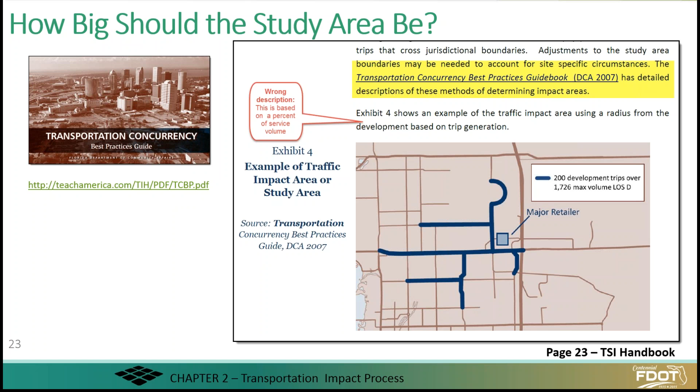Well, first, this picture came from the Transportation Concurrency Best Practices Guide. This document was done by the Center for Urban Transportation Research for the agency then called Florida Department of Community Affairs. This agency is now the Community Development section of the Department of Economic Opportunity. This guidebook is now out of print, but if you want access to this document, you can go to this page and download it.

For those of you that were not in attendance last month, simply put, concurrency is the practice of establishing a certain level of service and trying to make sure our facilities are operating at an acceptable level of service. So when a development comes in and has an impact on that transportation system, due to mitigation, we need to improve the impact and bring the operation back to the acceptable level of service. So that's what concurrency means.

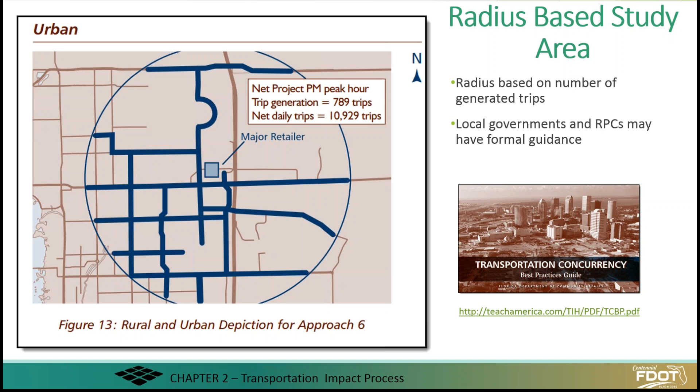So in order to understand the more difficult concept of a percentage of the maximum service volume, we need to understand a little bit of information about maximum service volumes as described in the Florida Level of Service Handbook and tables.

Let's say, for instance, that a certain community has adopted a level of service standard of D for its roadways. And let's say that the community has determined that any new development that adds 5% or more above that acceptable level of service is an impact and should be studied. So let's look at this example.

This is Deerwood Avenue. It's a 4-lane divided arterial, in an urbanized area, class 2. We are looking at it at peak hour, just to see how many vehicles this roadway or this development produces at peak hour. And as I said, let's say this local government has accepted level of service D for its roadways.

So we'll look at level of service D, and the maximum service volume for level of service D is 1,630. Before I go any further, let me show you where we got that 1,630 from.

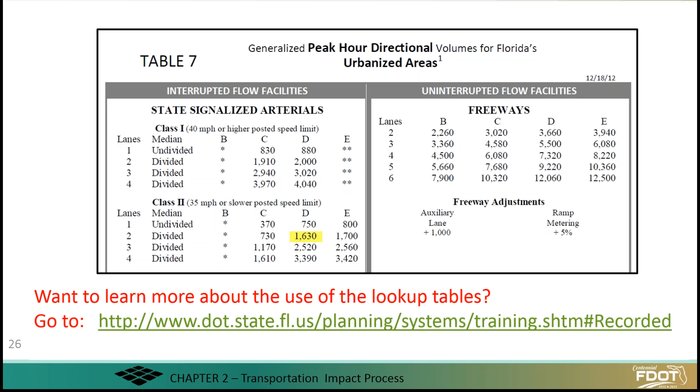Now let's go and do the calculation based on this service volume table. So we said the acceptable level of service, or the standard, is 1,630. This development produces 300 peak hour directional trips. So what do we do to see the impact? We divide 300 by 1,630, and that equals 18%. So this development has 18% more than the requirement.

Remember, we said 5% or more is an impact. So this is very significant — this is way over 5%. So again, mitigation takes place, depending on how big the impact is. We need to bring the transportation system back to a safe and efficient facility.

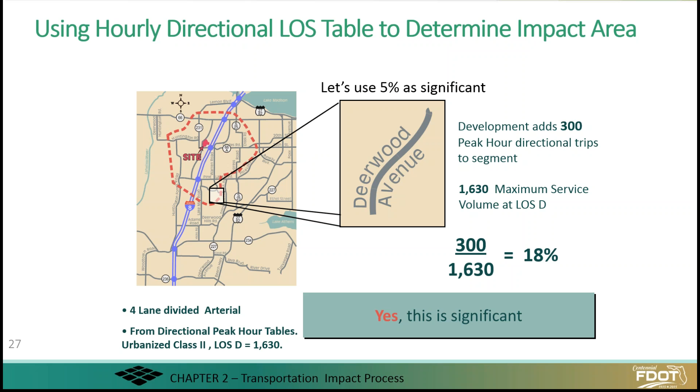At this point we've got large scale, small scale. I'd like to know what kind of impact studies are you involved in? You have a choice here.

As I suspected, this is a group of Renaissance people here. So I am going to close the poll and show it to you. You can see here that most of you do a range of developments, both large and small. Some of you do small developments, maybe in access management, driveway permitting, or small site plan review. I appreciate you answering that.

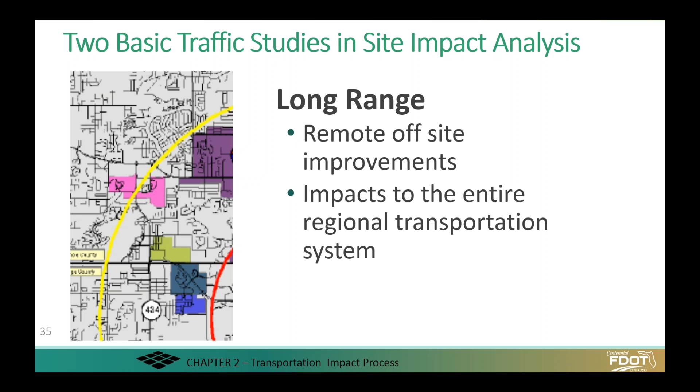So the long range kind of studies do take a look at remote offsite improvements. As you'll see in this next slide, this is a spreadsheet that used a version of our generalized service volume tables, or lookup tables, to look at what either existing or future projected levels of service are going to be.

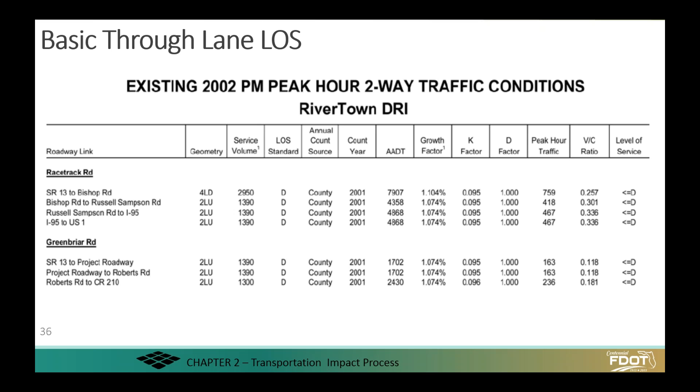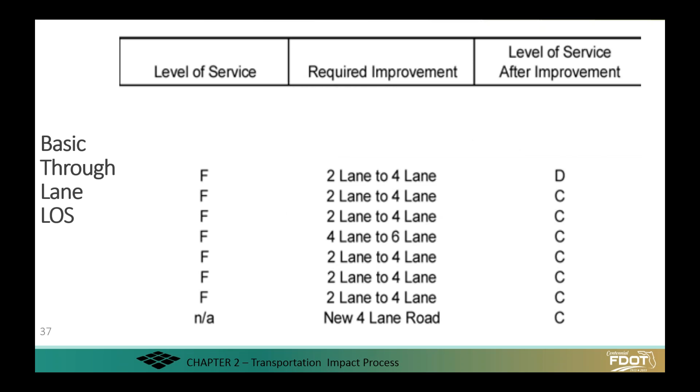Now, the short range improvements that we showed you a small portion of - this is a screenshot from a study of that proposed Walmart in Dade County. The study was done as part of a driveway access permit. In this example, Walmart is going to be built in one phase and have an immediate impact on the surrounding system. The things looked at are not necessarily widening of numerous roads in the region. Usually the study concentrates on driveways and signals surrounding and very close to the proposed development.

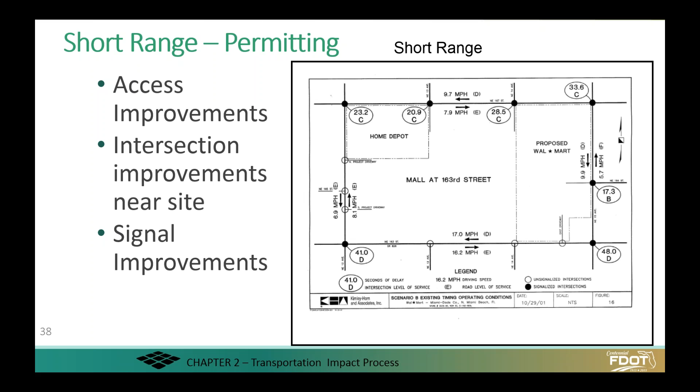As we expand this portion of the study, you can see the projected volumes, average speeds, and level of service at each of the intersections. This is because the most important features of traffic for this kind of study, found in access permitting here at DOT, are different than the kind you will find in the initial analysis of a development of regional impact or a big change to comprehensive plans.

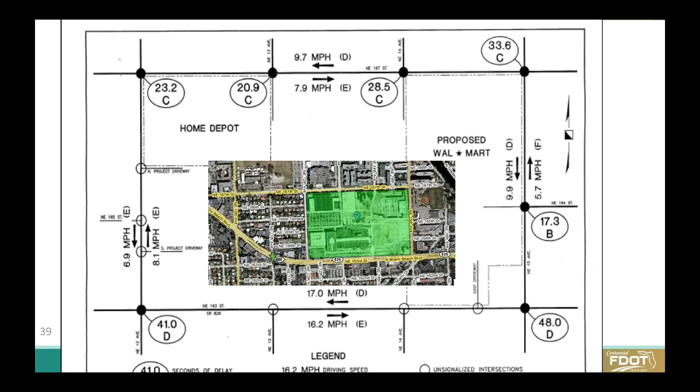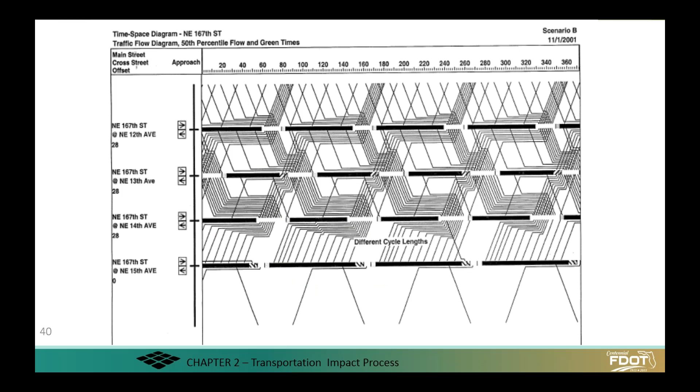This is a portion of the traffic signal progression analysis that was done for that Walmart. And this is the outcome and output of a queuing analysis that was done as part of that study of the Walmart.

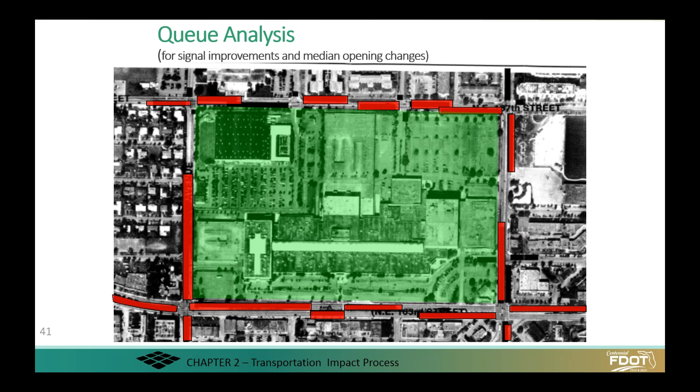So what I want to do is let you know that there are links in this presentation that you will be able to use as we send them to you, and there are links within the Site Impact Handbook also. While I'm at it, when you have your Impact Handbook open, if you go to the last pages of it, you will see that we have replicated every link used in the handbook chapter by chapter as one of the appendices, and that can lead to some pretty interesting surfing. So when you get a copy of the PDF of this presentation, you will have the ability to have all the links, even if something was done after the production of the Impact Handbook.

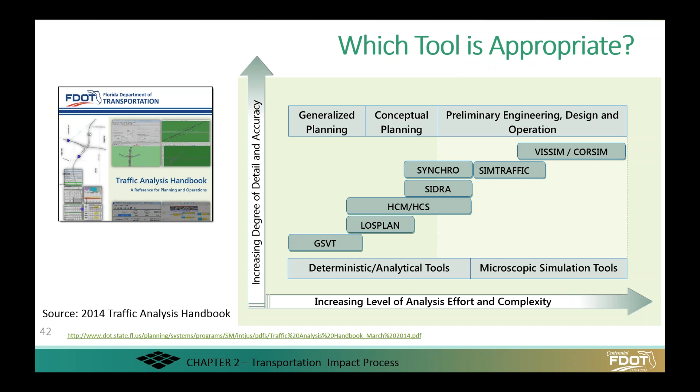highway capacity-based planning model that's used for arterials and freeways, and also for some rural roads also. As you go further up here into the Highway Capacity Manual, the Highway Capacity Software, Sidra, Synchro, SimTraffic, VISSIM, and CORSIM, what you're looking at are micro simulation models that have a lot of application, especially very close to a site, also for weaving analysis at interchanges when you need to know a more precise level.

So within the traffic analysis handbook, there is a much more detailed discussion of what are the recommended software and tools for the different kinds of studies. Again, you will find, and we will send you a link to the traffic analysis handbook. I'm giving you a chance to just quickly look at some of the kinds of studies and the recommended tools.

Okay, got another question I'd like to ask you, and that is, what transportation tools do you use or have you used in your job?

Yeah, it's coming out again as you guys are definitely the Renaissance people here. I'm going to close the poll in a few moments, give you a chance.

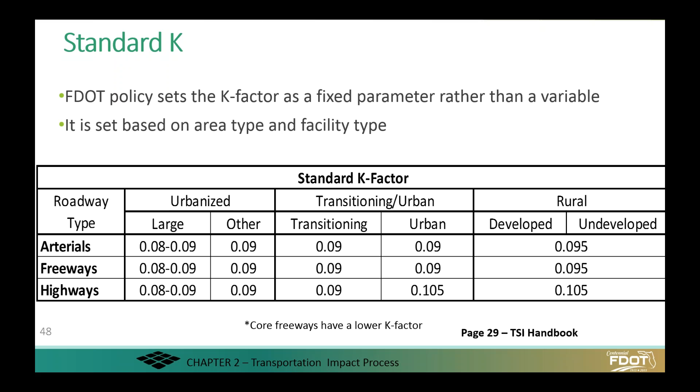I know this isn't the time for it, but I see questions coming in pretty solidly here. One of the questions is whether FDOT has a policy preference on what tools to use—for instance, should they use HCS, Synchro, or other tools?

There is no policy saying which tool has to be used. It all depends on the agreement at the methodology level, on what the applicant, the reviewers, or the local agencies sit down and agree upon. It also depends on the severity of the impact. For instance, at times HCS may not meet your needs, and you may have to go into a simulation model such as Synchro, Vistro, VISSIM, or CORSIM. It all depends on the reviewer and on the agreement set at the methodology level. So again, there is no policy saying what tool should be used, but there is guidance in the traffic analysis handbook on what level requires what tools.

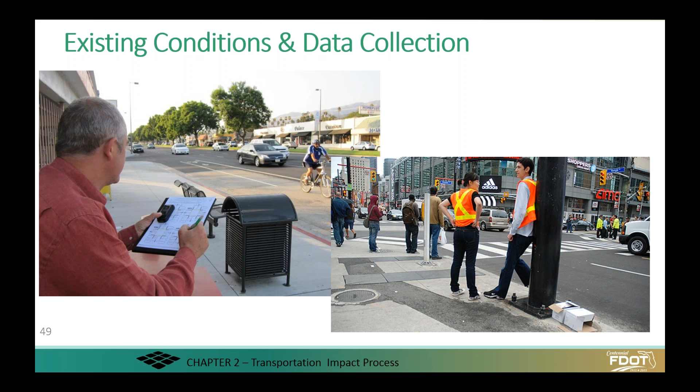One of your best references for the appropriate way to collect data is our own Quality Level of Service Handbook. DOT has developed this handbook and the accompanying software to do planning level analysis for highways, bus service, cyclists, and pedestrians. Since the handbook refers to the type of data that goes into the models we use—the LOS plan and the generalized service tables—it can serve as a good reference for data collection.

So these are what you need: site characteristics, transportation characteristics, transportation demand data, and the land use and activity on that land use. This is an example of a site plan developed for one of the most recent developments of regional impact in Taylor County. It shows proposed land uses and locations in relation to the surrounding transportation system.

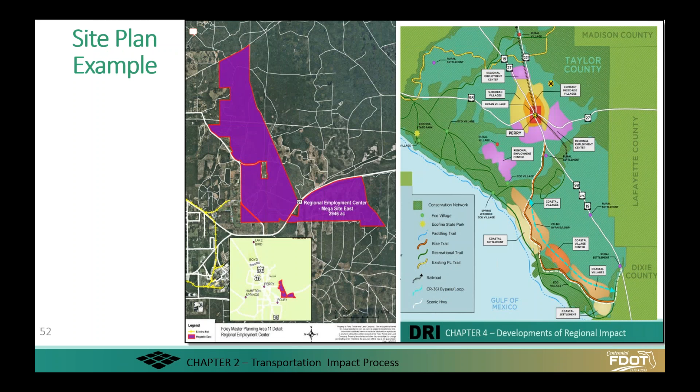This slide is an example of a very simple diagram of a roadway in a very small space. It provides a lot of information critical to the analysis of these intersections. Other important information that should be provided includes the jurisdiction of the roadways, the area types, and functional classifications—and don't forget there are other modes to consider. You should look at sidewalks, bike paths, their condition, the frequency of bus routes in that area, and this should probably have gone first—looking at crash information. If you can find a safety problem, there's a chance that during the improvement phase we can make the situation better for people.

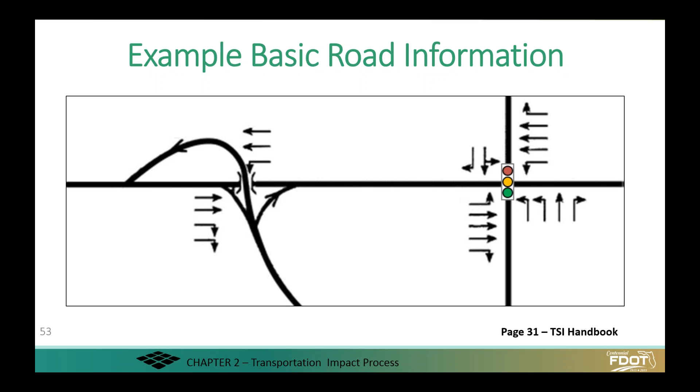In the handbook, we have links to numerous multimodal documents. They are on there, and you should take a look at those. They're constantly being updated in our public transportation section.

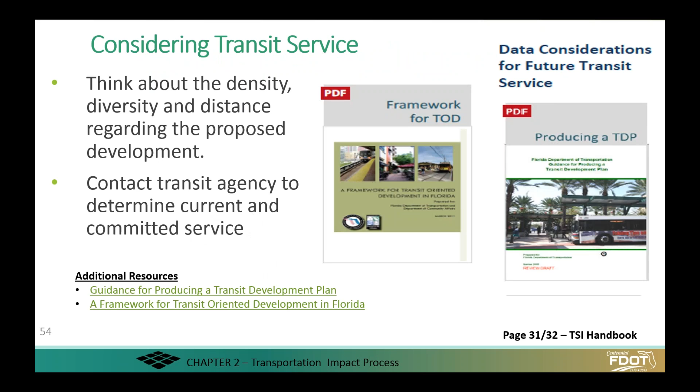This is a sample of a simplified diagram of turning movements, similar to the kind that you will need to be collecting, especially close to the site.

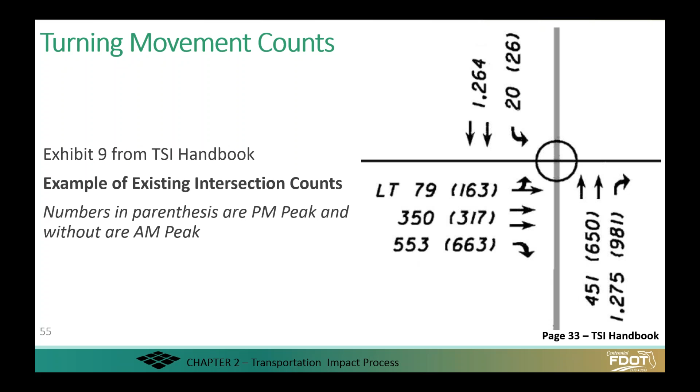This is just a reminder that your signals are impacted by pedestrians, and we should be serving pedestrians. It does make an impact in the way that you time your signal, so it is important.

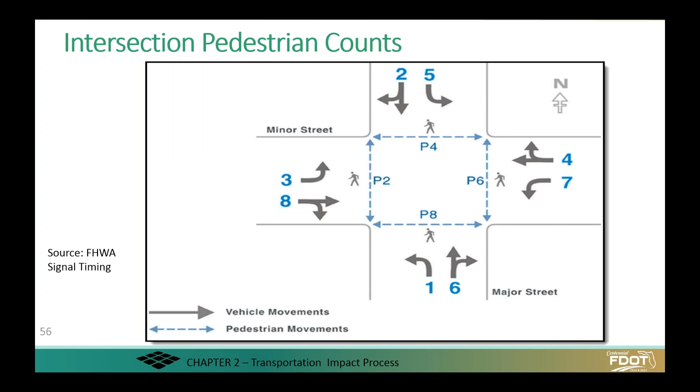Here are a few slides from our level of service training that we have recently done throughout the state. However, even if you can't make the one remaining training session left in Miami on June 17th and 18th, the handbook, as well as all the training materials, are available to the public, and we'll make sure that you can get it.

This just shows some photos of situations that impact pedestrian level of service. So when improvements are made, you can try not only to improve the traffic situation, but also to make the pedestrian situation more comfortable and safe.

And this is just another picture of some of the features that impact pedestrian level of service.

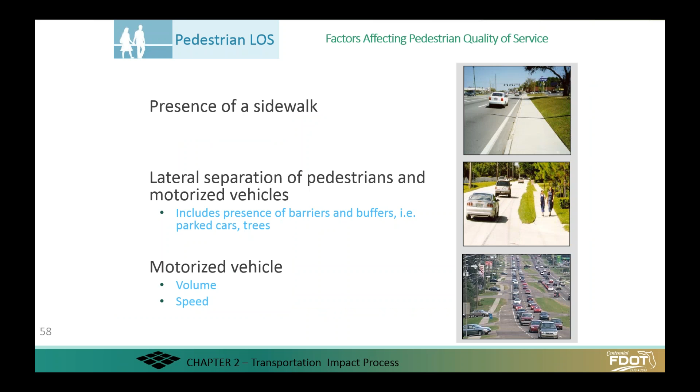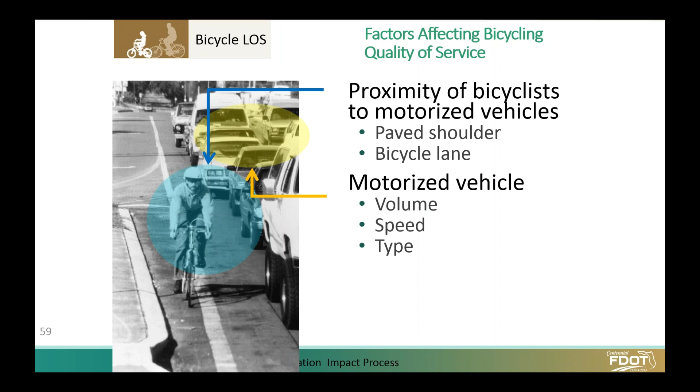Bicycle level of service is also handled in our LOS plan and generalized service tables, as well as the Highway Capacity Manual. These are the different things that impact the level of service. One of the main things is the amount of traffic whizzing by the bicycle and the speed at which it is traveling.

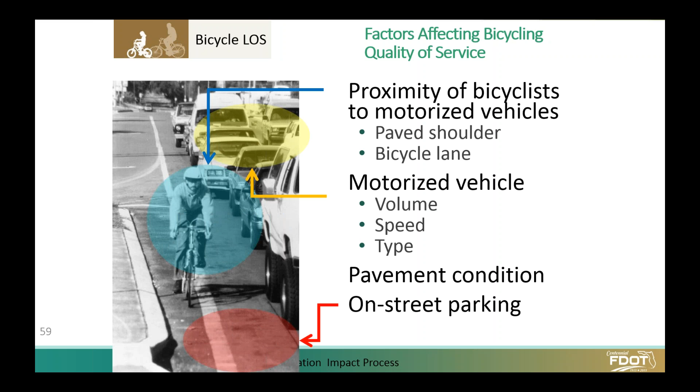I wanted to mention at this time that FDOT has recently updated its standard bicycle lane to a buffered 7-foot bike lane. This is an example in Gainesville.

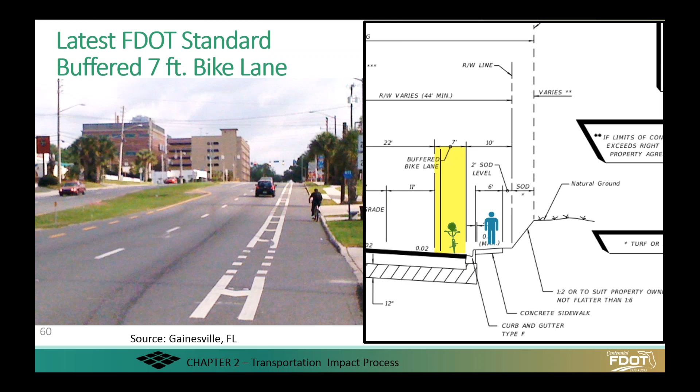Are the 2014 traffic counts DVDs available? That's a good question, Gary, because that would be available in the month of June, very soon. Yes, it's usually available in the month of June.

They're working on it, and that DVD is pretty amazing, as you'll find out when Andrew talks a bit about it.

I'm going to unmute. Ernest, if you want to have the floor. Oh, okay, Gary, are you interested in saying something? I'm wondering if they raised their hands when we asked them to, and they just didn't put them down. What I'm going to do is unraise everybody's hands. I like people to feel free to speak their question if they need to. We've put all the hands down, but if you still have a question and you'd like to speak, feel free to raise your hand, and then we'll know you have a question to ask. Yeah, thanks a lot.